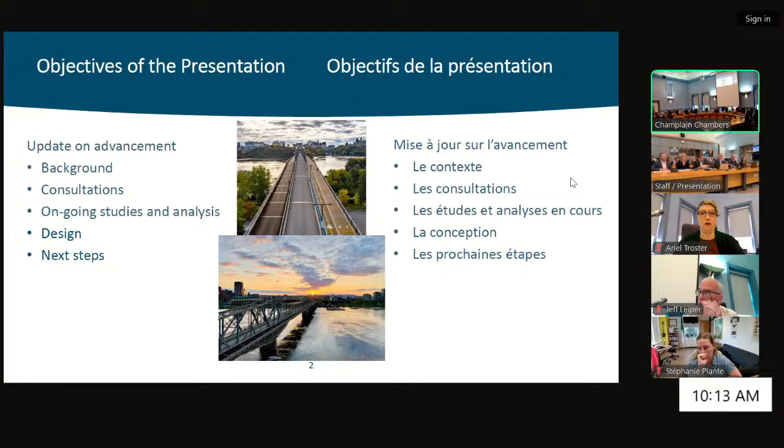Thank you, Stéphanie. Are we changing slides, or okay. So, next slide please. Yeah. I'm sure that... the previous slide.

There we go. I'm sure you're aware that the Alexandra Bridge is at the heart of the capital. It's steps away from Parliament Hill and it spans over the majestic Ottawa River. It connects Boulevard des Allumetières in Gatineau to Sussex Drive and Mackenzie in Ottawa, and it's also an important segment of the Confederation Boulevard.

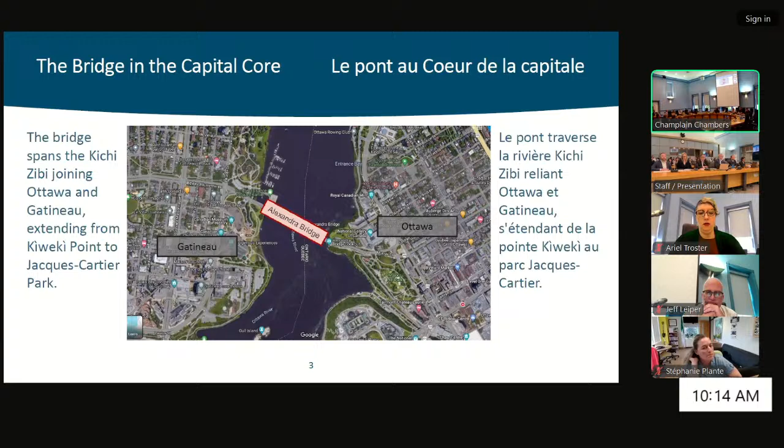Next slide, please. So in Ottawa, the bridge lands at the escarpment between Kìwekì Point and Major's Hill Park, and it's also a doorway into the Byward Market.

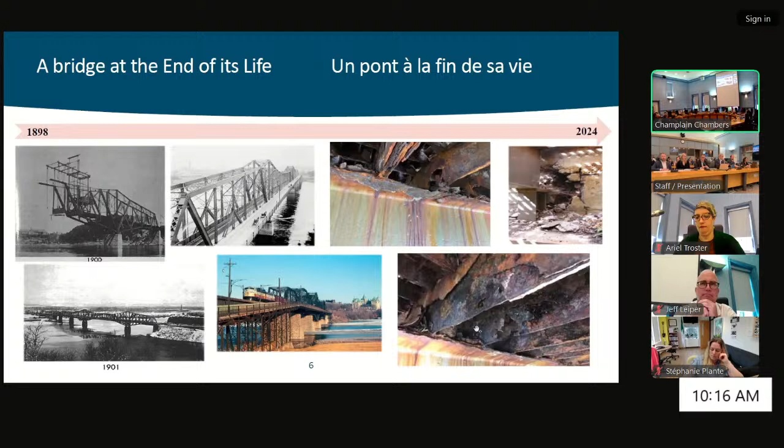Next slide, please. So following the decision to dismantle the historic bridge, in the summer and fall of 2023, work began on a series of studies led by the technical advisor team, one of which is a cultural landscape focused heritage impact analysis, or HIA. The HIA is the process being employed on the project to understand the heritage value and character-defining attributes of the Alexandra Bridge and its prominent cultural landscape setting.

Ultimately, the goal of the HIA is to help ensure that these values are carried forward in multiple ways, notably through the design of the new bridge and through commemoration.

The goal is also to ensure that the new bridge harmoniously integrates with its symbolically charged, complex, and very layered setting. Our study area comprises the river-focused lands and waterways bounded by the Chaudière Crossing to the west and the Macdonald-Cartier Bridge to the east.

The work itself encompasses historical research, detailed analysis of the contemporary physical and cultural setting and how the historic bridge participates in it. There's heritage value assessment and identification of the tangible and intangible attributes that carry these values. An assessment of the impact of the dismantlement of the historic bridge has been undertaken based on these values and attributes. This has provided the starting point for articulating a future-focused set of cultural landscape objectives and a heritage conservation approach to ensure the development of a bridge design that helps to bridge past, present, and future. The HIA process has been happening in parallel and coordinated with the design process, with the HIA team working in close dialogue with the bridge designers.

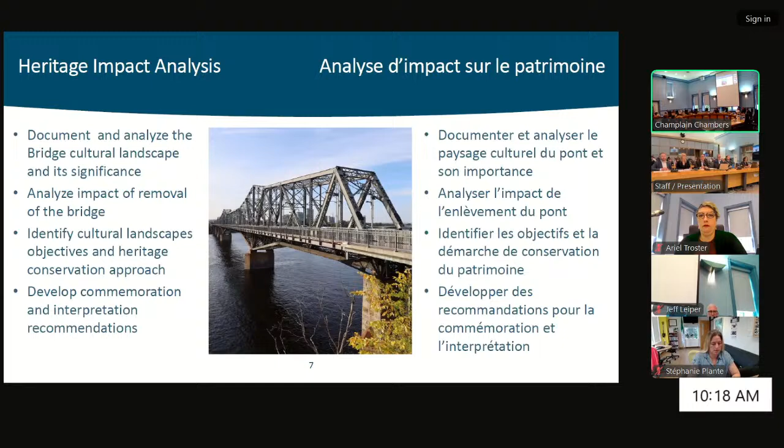A series of traditional knowledge and land use studies led by Algonquin communities are underway and serve as the authoritative sources of information about this landscape.

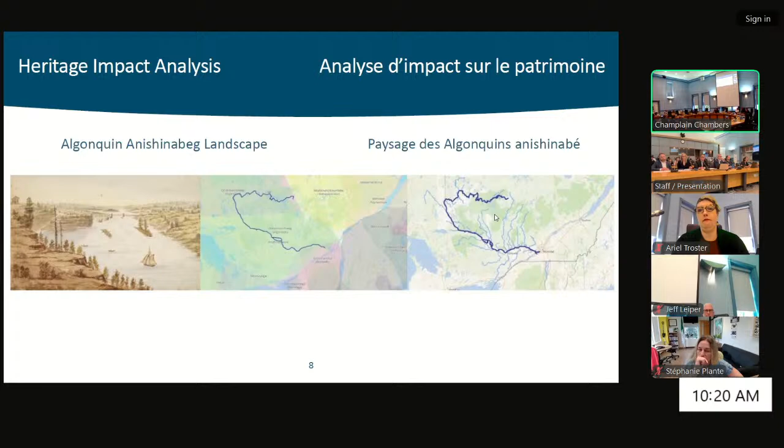Next slide. The urban landscape emerged after the first permanent European-style settlements were established on both sides of the Kitchissippi or Ottawa River in the early 19th century. At that time, the urban landscape was characterized by primary resource development that relied on the river's water for power and transportation. The Alexandra Bridge itself is associated with a very specific era of the region's development, which saw the expansion of rail transportation in support of resource extraction and Ottawa's development as the capital of an emerging nation. This is a landscape that was focused on movement of goods and people, with industrial and commercial development on both sides of the Ottawa River, and it was part of, and sometimes in tension with, the capital landscape.

Half a century after its construction, the rails were removed from the Alexandra Bridge and the surrounding infrastructure was transformed to accommodate exclusively vehicular traffic and pedestrian routes. Within the cores of Gatineau and Ottawa, former railscape corridors and industrial lands became part of the growing parkland, with ribbons of green spaces along waterways and through spaces that had once housed smokestacks and steam trains. Over time, the crossing also became a critical community connection point, both physically and symbolically, in a region often marked by boundaries and divisions. The Alexandra Bridge is not considered as belonging to either Ottawa or Gatineau; the crossing is symbolically shared by both sides of the Kitchissippi or Ottawa River.

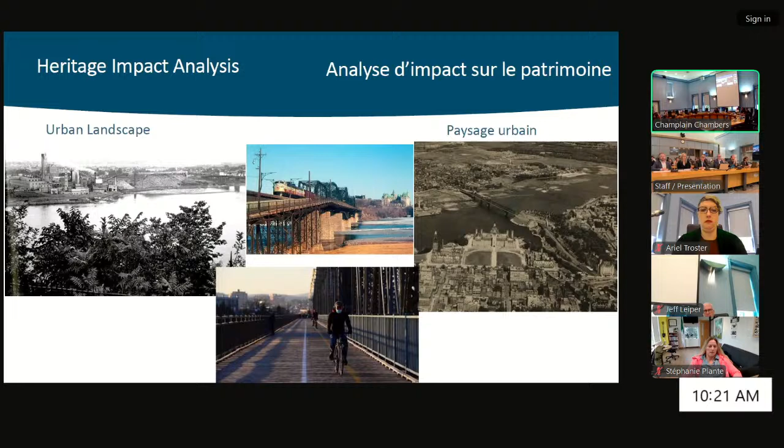Next slide. The central capital landscape is a designed and evolving landscape that has developed in tandem with the evolution of Canada's national identities and with capital planning. Originating with the creation of Parliament Hill and the Parliament buildings in the 19th century, it expanded gradually to encompass the river-focused lands on both sides of the Ottawa River, connected by bridges, including the Alexandra Bridge, and more recently a ceremonial ring road, known as Confederation Boulevard, of which the bridge is part. Many elements of the historic railscape and industrial landscapes of the region have become part of the central capital landscape and contribute to its character and identity.

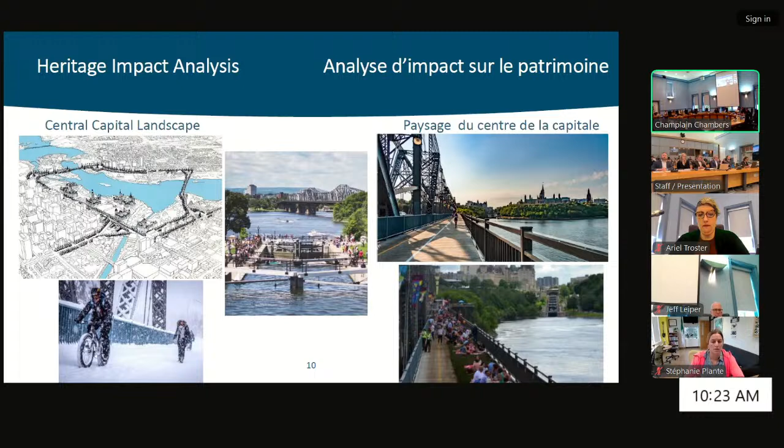And at present, we're witnessing a gradual transformation of this landscape through the renewal and emergence of Indigenous patterns of use and activity, and through a variety of projects and initiatives. Examples include the Museum of History, Kìwekì Point, the Future Block 2 project, and many others, all of which are recontextualizing and reimagining colonial dimensions of this setting. Next slide.

Through cultural landscape analysis, we've identified 4 high-level themes that represent sustained patterns within this setting across landscapes, eras, and cultures, which serve as a starting point for bridge design. They are: evolving relationships to land; a landscape of connection, which has moved people across the region, brought diverse groups together, and inspired unity across borders; a living experiential landscape which speaks to shifting human relationships with the Ottawa River over time; and a symbolic landscape tied to capital and Canadian identities.

Looking at the immediate setting of the Alexandra Bridge highlights both the extraordinary sensitivities of this prominent setting, as well as opportunities for the bridge project.

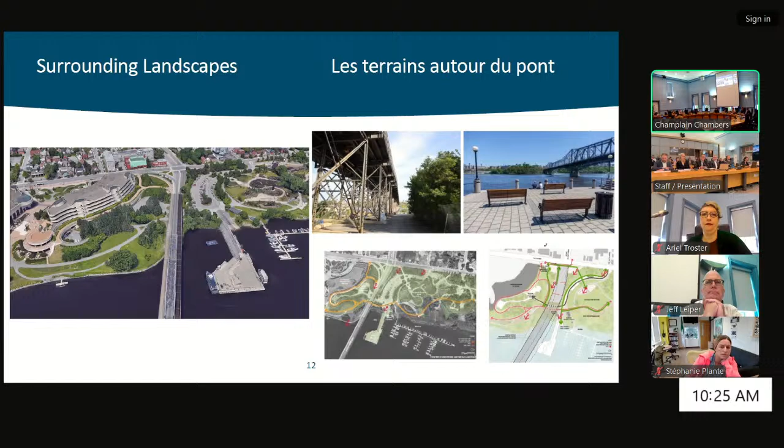On the Ottawa side of the river, in addition to Parliament Hill, we have the Rideau Canal World Heritage Site, Majors Hill Park, the National Gallery, and Kìwekì Point.

Something previously noted, especially on Parliament Hill and Kìwekì Point, is the sensitive renewal and transformation underway. This renewal is taking place in ways that balance a respect for history and heritage, while at the same time expressing 21st century aspirations, notably ones related to truth and reconciliation, accessibility and inclusion, ecological restoration, and sustainability. These projects are also recognizing in important ways the centrality of the Kitchissippi or Ottawa River across cultures and eras.

Through our cultural landscape analysis, Indigenous engagement process, and assessment of the value and meaning of the Alexandra Bridge as an engineering work, as a form of architecture, and as a multi-sensory experience of the river and public space for communities and tourists, we are working to bridge past, present, and future. This will commemorate what will be lost through the dismantlement of the historic bridge, but also carry forward value-bearing aspects of the bridge and its role in its evolving urban and capital setting through the design of the new bridge.

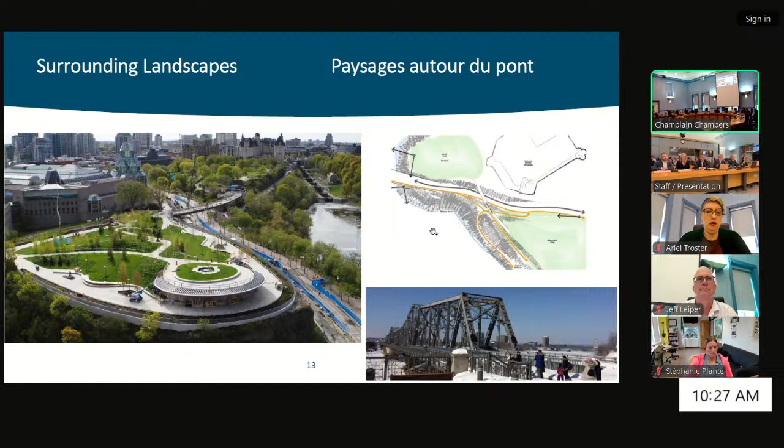In addition to the heritage impact assessment, which is informing the project team, we've got numerous other aspects that the team is using to advance the design concepts. Over the next few slides, I'll go over some of those.

Some of the fundamental documents guiding the team are the planning and design principles, as well as the performance criteria for bridge design. These two documents were approved by the NCC Board of Directors a few years ago. They give us clear criteria to meet, and they're also a transparent process which we can use to design the new bridge.

We also have the detailed project description that was produced by the team. It was presented to the Impact Assessment Agency, and based upon the strength of that document, the Impact Assessment Agency decided to pull out of the impact assessment and let PSPC manage that.

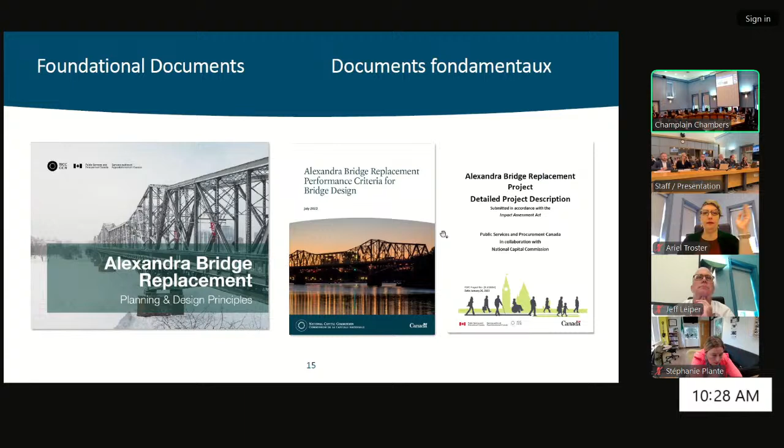Through some of these documents, the public consultations, and engagement with our partners, functional needs were established for the replacement bridge. Starting on the west side of the bridge, we're looking at having a lookout area where people can stop, sit down, stand up, and enjoy the views from the bridge. We're looking at having a pedestrian walkway, wider than the existing bridge. Separate from that, we'll have bidirectional cycling lanes, also wider than what's on the existing bridge. And on the east side of the bridge would be 2 traffic lanes, one in each direction.

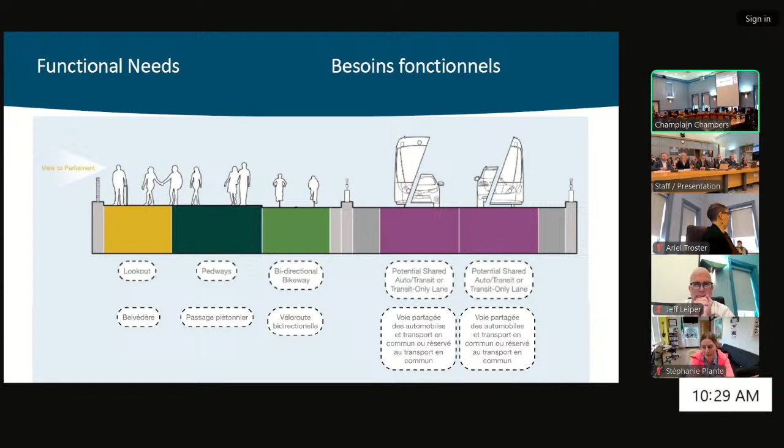For now, the traffic lanes would be used by vehicles or public transit, but the lanes and the bridge would be designed to welcome a tramway, should a tramway be required on the bridge in the future.

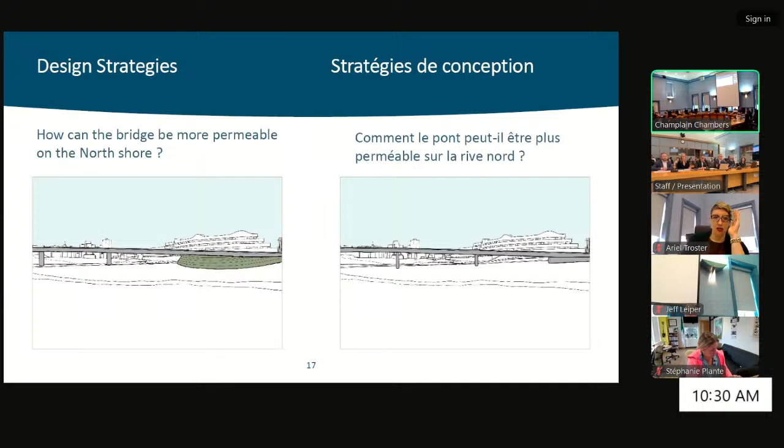Various design strategies that we're looking at: on the North Shore, in Jacques Cartier Park, we want to make that area more permeable. Right now it's heavily dense because of the current structure that's there. What we're looking at is opening up that space and improving the connectivity between the bridge, the cycle paths, and the shoreline. One way of doing that is looking at a slight adjustment in the location of the bridge, maybe a different alignment slightly downstream.

In terms of height of the structure, we're looking at respecting the topography, so nothing that is significantly higher than the topography that's there or some of the cultural buildings that are there.

Third, in terms of structure above deck, we're looking at something that's appealing, that has architectural features that will resonate with the community.

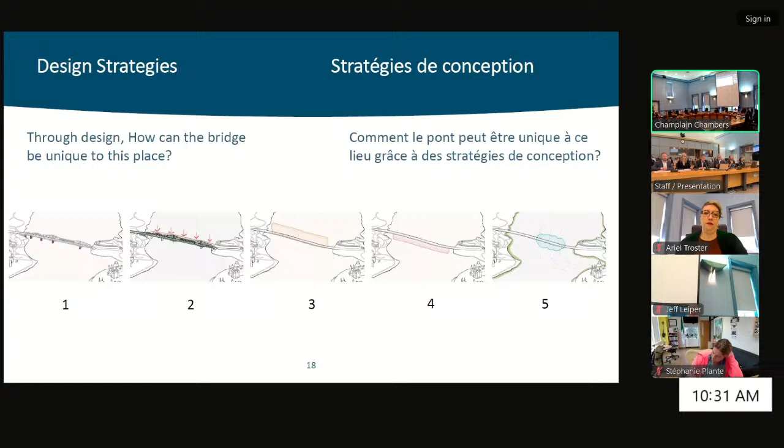And then lastly, in terms of the navigable waterway, we're looking at maintaining the current waterway, so similar dimensions.

Over to Jordan, I believe. Thank you, Paul. One of the first steps in this process was to proceed with an impact assessment, as this project is subject to the Impact Assessment Act.

We submitted a detailed project description, which includes identification of foreseeable impacts before, during, and after construction, as well as mitigation and follow-up measures. The Impact Assessment Agency of Canada reviewed this document, and in March of last year, considered the document complete, and we are now in the process of fulfilling our legislative requirements with respect to the environment.

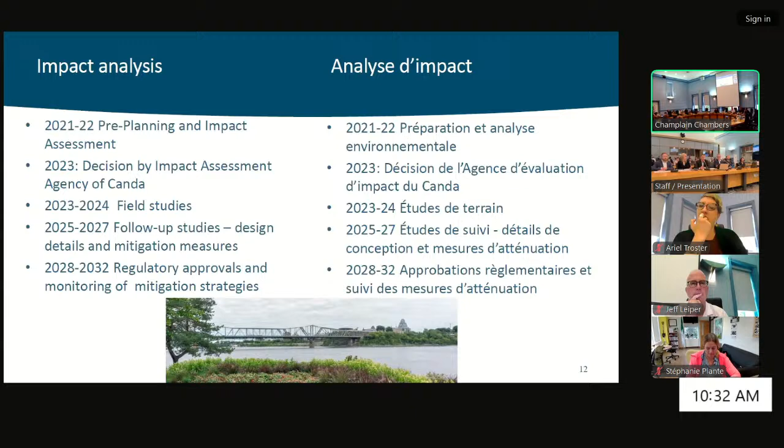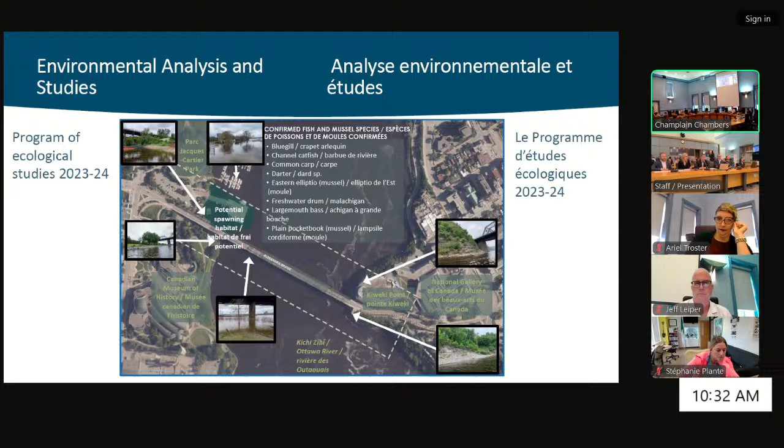The team, as we have seen, is made up of PSPC and NCC employees who are excellent. And in order to continue our studies as well as further define our bridge design concepts, we have contracted a consultant, Arup Canada Incorporated, who is world-class, and they're supporting the team throughout the development of studies and processes. With respect to the groups that we are engaging with, the objective and the challenge is to bring the interests of each of these groups together towards a final design concept.

Probably the most important chapter in this process is our engagement with Indigenous communities. We have to date engaged with 19 different communities from 3 different nations. There have been 2 rounds of public consultations to date, in October 2020 and November 2021, with one upcoming in October of this year.

There's the Public Advisory Committee, which brings together representatives from various spheres of the community, and there's engagement with all stakeholders who will be directly affected by the work. The team and the project also benefit from the expertise of 2 of NCC's national expert committees, the Advisory Committee on Planning, Design, and Real Estate, ACPDR, and the Advisory Committee on Universal Accessibility, ACUA. A committee of independent experts has also been established through the Royal Architectural Institute of Canada to support the team in the development of design options.

All of these conversations, feedback, and thinking are going to flow into the final design concepts for this bridge, which, as I mentioned, will be shown in October of this year.

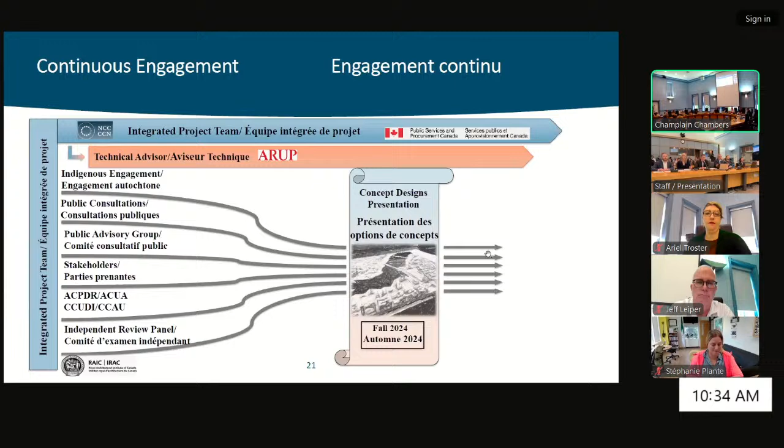A bit of a snapshot of where we are now: we are currently in the planning phase, working on studies and concepts. A design phase will proceed, and construction will start in 2028, with completion expected in 2032.

The Alexandra Bridge has served the Ottawa-Gatineau area very well. However, it has surpassed its initial functionality. As demonstrated by my colleagues earlier in this presentation, now is the time to replace it.

It also puts us in a position to seize many opportunities, such as improved mobility for active transportation. The new bridge will have gentler slopes and will also allow for better segregation of users, i.e. pedestrians and cyclists, while creating far more inclusive public spaces. In keeping with the long-term vision for the National Capital Region, the new bridge will be designed to allow for the conversion of vehicular lanes to streetcar lanes.

This provides the Ottawa-Gatineau region with the opportunity to adapt to new urban travel standards in the years to come. The views from the bridge are currently being studied in order to preserve and even improve these perspectives. We have two jewels in this area, Ottawa-Gatineau, and we are going to improve the viewpoints from the bridge.

On the Gatineau side, the new structure will offer the opportunity to improve connectivity and accessibility along the river, something that the people are asking for. The project also offers the opportunity to introduce subtle variations to improve and modernize Confederation Boulevard. There are many other opportunities that will be revealed as we continue through this process and as we continue to meet with our very important stakeholders and public groups.

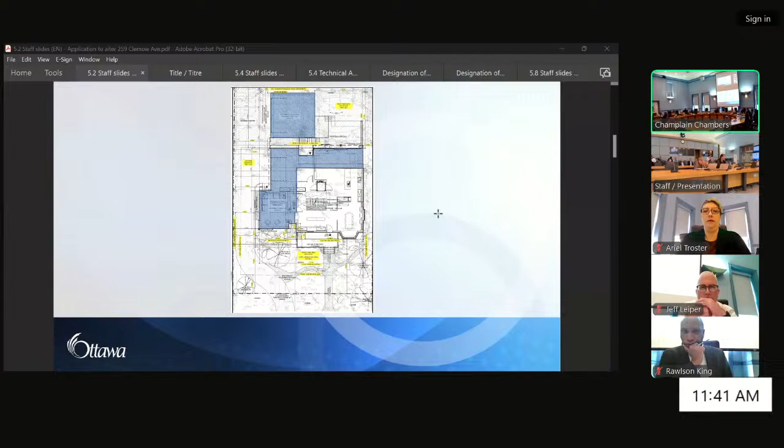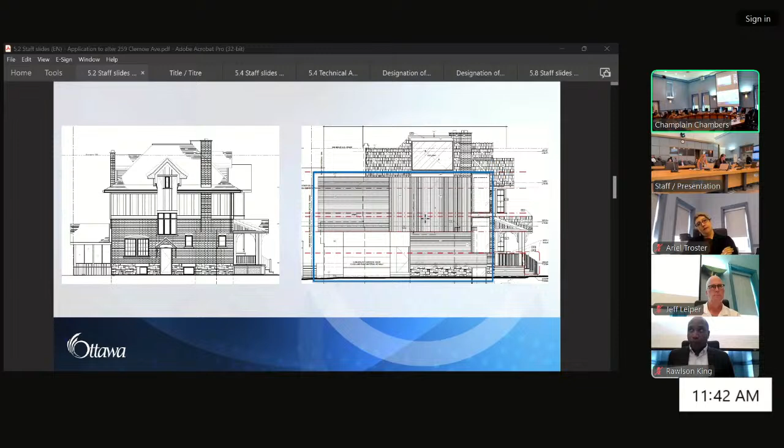Next slide. Here's the addition from the side, which is the west elevation. The addition is set back slightly from the front wall of the house. Next slide again. And this is the rear, showing the addition again highlighted in blue on the right-hand side. Next slide, please.

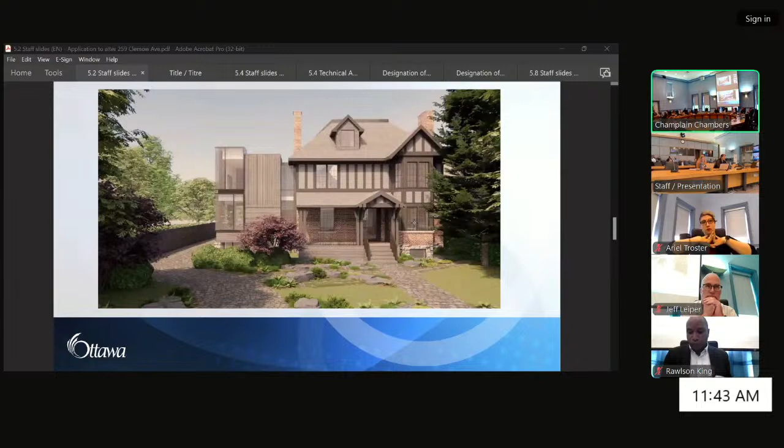The proposal has been evaluated against the guidelines in the Clemow-Monkland Driveway and Linden Terrace Heritage Conservation District plan. Staff have determined that the proposal is consistent with the plan for the following reasons. The height of the addition is lower than the height of the roof of the existing building, as it will be just above the eaves line. Further, a recessed glazed link, referred to as a gasket, is even lower than the eaves line, thereby creating more separation in location, height, and setback from the Tudor Revival house. The location of the addition is in the rear and side yard. The HCD plan has a guideline regarding the placement of additions, that they should typically be in the rear. However, when a side yard addition is proposed, it should be set back from the front wall. The addition is set back from the front wall; however, it is staff's opinion that it should be pushed back further in order to ensure subordination and better understanding of the three-dimensional volume of the existing house. A condition to set back the addition further from the front wall is recommended as part of this application. The design of the addition is contemporary in nature, however takes design cues from the house in terms of datum lines and proportions. The HCD plan allows for a variety of design styles on additions, provided that it complements and respects the cultural heritage value of the district.

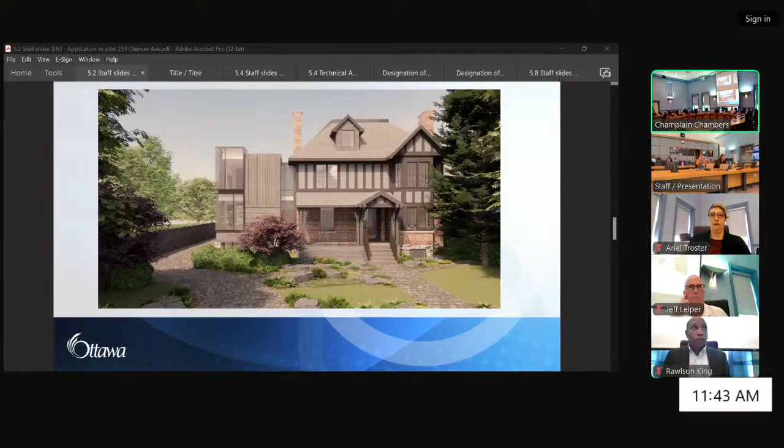Next slide, please. The material used on the addition will be primarily wood with some bronze cladding used as an accent. While used in a contemporary manner in the design, the use of wood is appropriate in the district and subordinate to the brick of the house. The primary treatment of the heritage structure is restoration. The roof cladding will be replaced with cedar shakes, and the porch will be retained with some elements proposed to be replaced with metal. The windows on the existing house are not original and will be replaced with new windows.

However, not all the windows are currently proposed to have divisions. A second condition has been recommended by staff to ensure that the materials and details on the porch meet the HCD plan, as well as that all windows have appropriate divisions on the historic house.

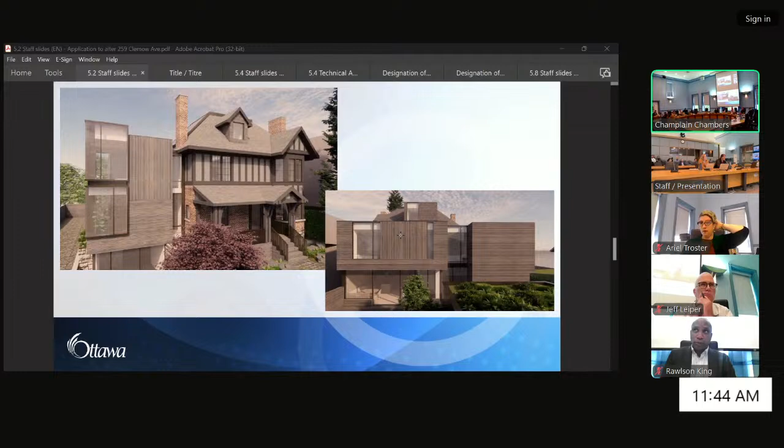Finally, the landscape plan features a front yard garden, simple limestone walkway, and planting of 2 new trees. A new permeable driveway will be installed and a green roof will be planted on the detached garage, enhancing the greenery on the property.

Just to go over the conditions quickly, as mentioned, we're recommending conditions be in place to better meet the policies and guidelines in the HCD plan. The first one here is related to the setback of the addition.

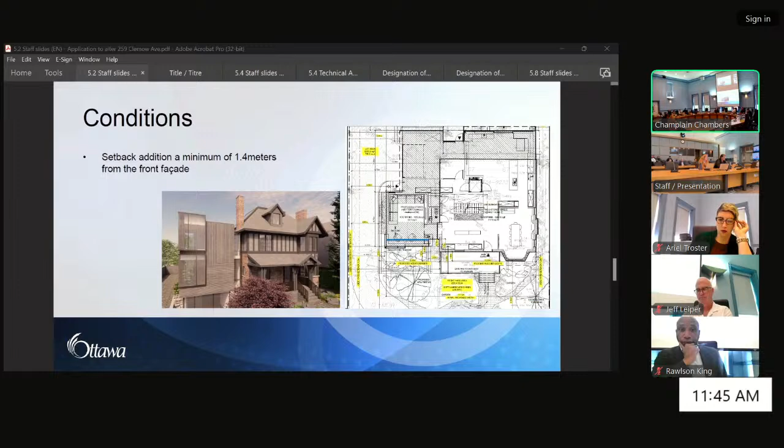To improve the conservation approach on the house, staff also recommend that all the windows on the existing building contain the appropriate muntin bars. Further, the approach on the porch should be improved by the use of wood on the baluster instead of metal and refining the details of the skirting. These recommendations are echoed in the heritage impact assessment submitted as part of the application.

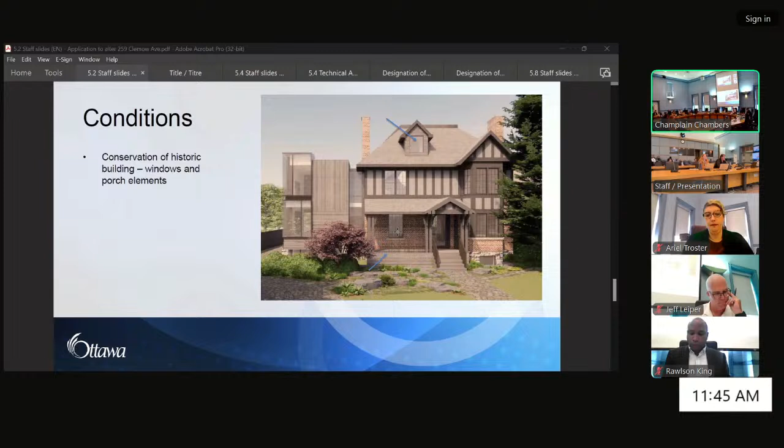In terms of consultation, the Glebe Community Association and Heritage Ottawa were notified, as was the ward councillor and the neighbors.

Finally, staff recommend to approve the application for the alteration subject to the conditions just outlined, and issue the permit for a 2-year expiry date.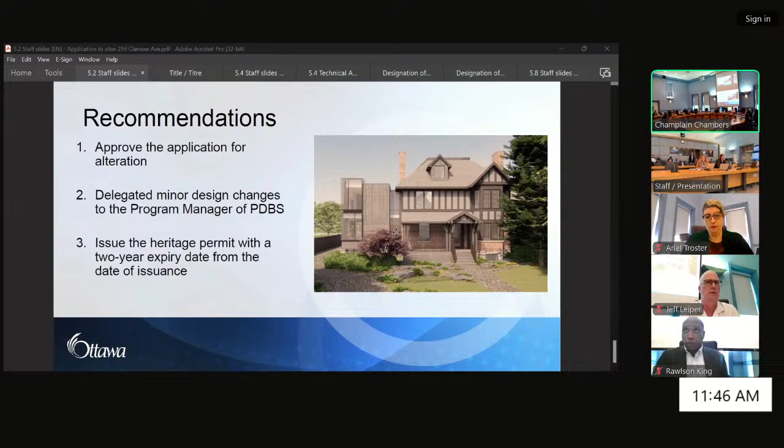Thank you. Thank you so much for the presentation. We did receive correspondence from Heritage Ottawa as well as four residents.

We do have a number of registered speakers, including the applicant team. I don't know if they want to speak. We also have Heritage Ottawa registered, as well as Robert Player registered. I didn't know if the applicant team is with us and wanted to comment. Okay, and Heritage Ottawa, if required, I don't know if Linda Hogue is still with us. And then we do have Robert Player as well registered. Yes, please, if you want to delegate, please go ahead.

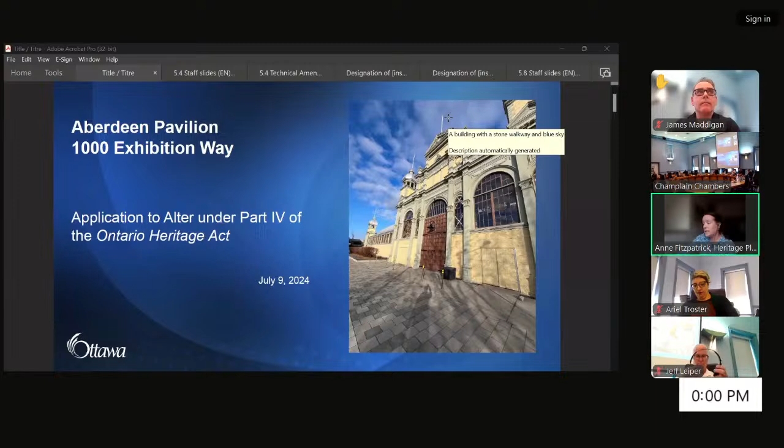Good afternoon, and thank you, Leslie, for the introduction. This presentation is for the application to alter the Aberdeen Pavilion. As Leslie mentioned, it's a hybrid presentation, and it's also a joint presentation today. I'm the heritage planner who's been working on the file, and also here today are Robert Martin and Summer Bourgon from RMA and SH Architects, Josiah Fogarty the structural engineer, Sean Stanhead, and Matt Knight, Manager of Design and Construction, Facilities at the City of Ottawa. Next slide, please.

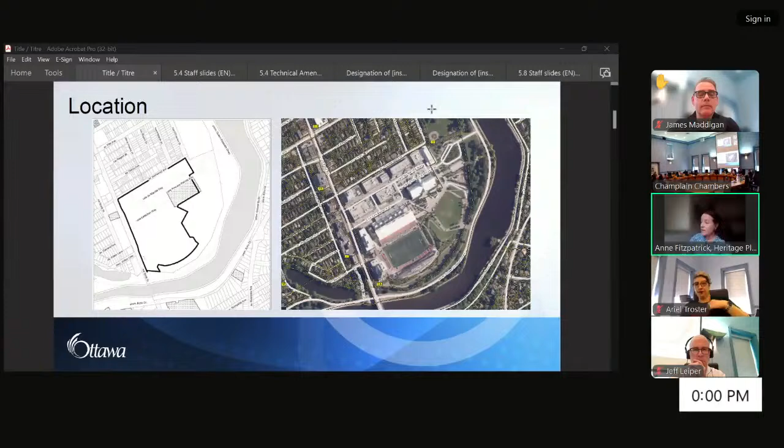The building is located in the center of Lansdowne Park, in the Glebe, and is adjacent to the Rideau Canal. The Aberdeen Pavilion was constructed in 1898, designed by architect Moses C. Edey and constructed by the Dominion Bridge Company. It is a structural steel and pressed metal exhibition hall. The building has heritage status at the municipal, provincial, and federal level, is designated under Part 4 of the Ontario Heritage Act, and is a National Historic Site. It is also subject to an easement with the Ontario Heritage Trust, and the proposed rehabilitation will require their permission.

The project team has been working closely with the trust, and they are supportive of this project. The building is an iconic heritage building in Ottawa. It's the only large-scale exhibition building in Canada surviving from the 19th century, and it's an important engineering achievement as the first use of long-span steel arches exposed to the interior. I'll now pass it along to Matt Knight, who will provide an overview of the project details.

Thank you, Anne, and thank you, committee. Infrastructure and Water Services is rehabilitating Aberdeen Pavilion as part of our standard life cycle program. The work proposed builds on past city conservation activities in 1992 and 2017, and was prompted by a 2019 condition audit identifying sources of water infiltration and deterioration of certain building elements. This project is distinct from the Lansdowne 2.0 project; however, both teams are in regular communication and schedules are being carefully coordinated to minimize impacts to residents, businesses, and the Lansdowne 2.0 project. Funding has been secured for design, construction administration, and essential structural work. Further funding needs will be identified as part of the 2025 budget process. Now I'll hand off to Summer, who will take us through some of the further project details.

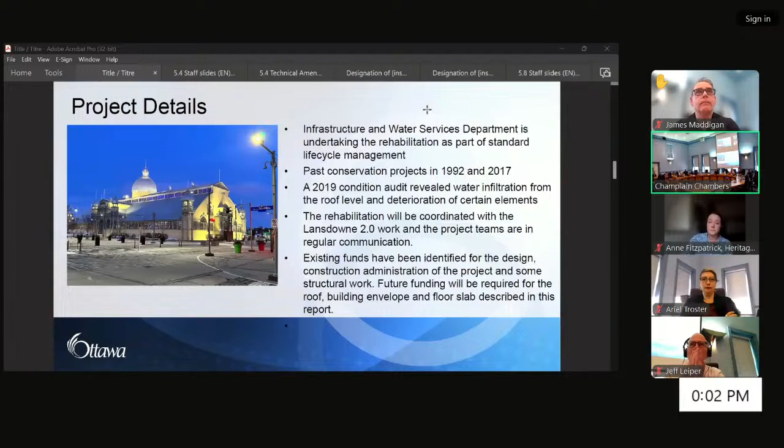So the project as a whole is focusing on the rehabilitation of the entirety of the building envelope. As Matthew mentioned, there are significant concerns with the roof, so that is the main scope of work for the project. In addition to metalwork repairs, structural strengthening, rehabilitation of windows, doors, concrete floor, and lead paint abatement inside the building. So that's just a general snapshot of the whole project.

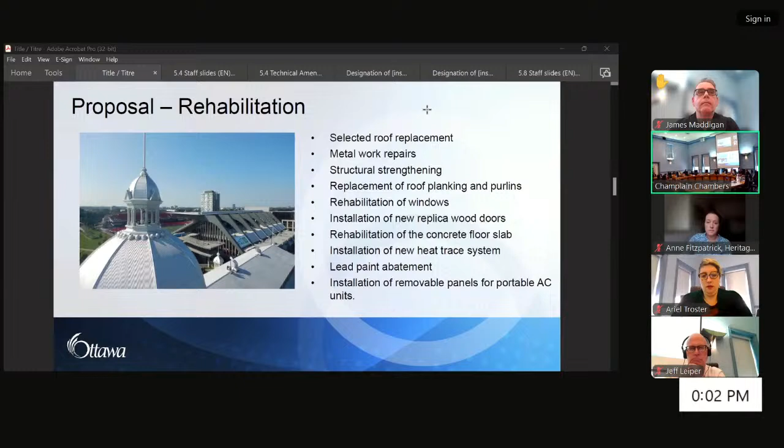When City of Ottawa started this project back in 2021, one of the main focuses at the beginning was documentation. As you can see in the photo, they commissioned a laser scan back in 2021 of the entire building. We've actually just completed another set of laser scanning with Multivista in 2024 as well. So we have significant documentation to work from to capture all the conditions in the building.

We also did a detailed condition assessment with the RMA plus SH and Stantec team in 2023 from the ground and by lift, so an up-close review to capture all the conditions and thousands of photos as well for record.

In 2023, we completed tie rod scanning. There are tie rods that span between the trusses inside the building, so we did scanning to locate those tie rods and also did some slab investigations to look into the rehabilitation of the slab. Hazardous material sampling was done this year, as well as some lead paint removal mock-ups, which were completed a couple weeks ago. Coming up as well, there's going to be some geotechnical investigations done in support of the project. So a really comprehensive investigations and documentation package to kick it off.

Going forward with this project through the design, we've also been looking heavily at the 1992-1993 Julian Smith restoration package, which was completed at that time. That's been a really sound basis for our design as well.

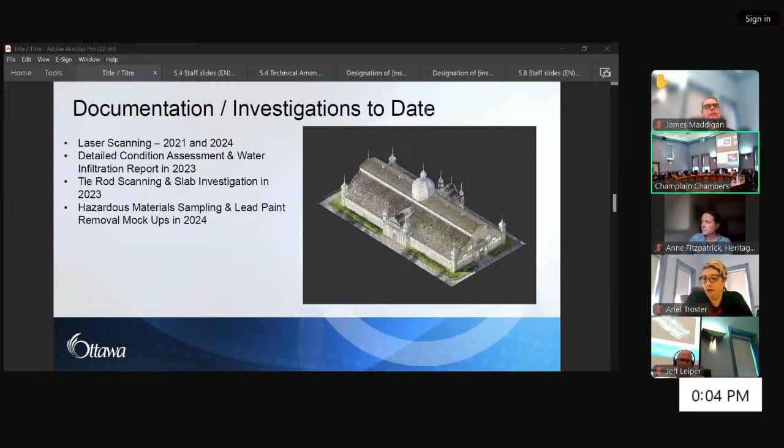Looking at each of the individual components, the roof is really the big ticket item here, as Matt mentioned, with the water infiltration that was noted in our infiltration report. The condition of the roof is very poor. Water effectively finds its way in through any little hole. There's no waterproofing membrane on the roof. Due to the ongoing water infiltration that's been happening over many decades, the wood boards and purlins have also significantly deteriorated as part of the roof deck. So the main focus of this project is replacing the roof.

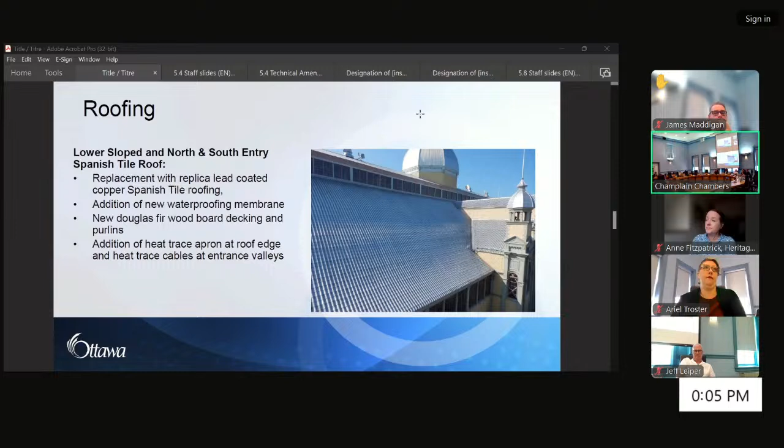The bell cast roof, which is the large slope roof you see there, has a Spanish tile, pressed Spanish tile roofing system. We're going to be replacing it with replica Spanish tiles, adding a waterproofing membrane because none exists right now, and replacing the wood board decking and wood purlins as well. In addition, with some of the ice and snow buildup issues we're seeing on the roof, we are adding a heat trace system along the eaves and replacing the existing heat trace system on the north and south pavilion entrances.

At the dome and clerestory and east and west entry roofs, these are currently corrugated roofing systems. They are also going to be replaced with a lead coated copper system, same as the replica Spanish tile, which will replicate the pattern of the corrugated roofing in a pressed tile. We are going to be adding the waterproofing membrane on the clerestory roof and the east and west roofs, and doing localized replacement of the decking at this level, as it's not as deteriorated as the bell cast roof.

On the turrets and cupola, these roofing systems are slightly different, flat sheet roofing. They're in fairly good condition, so they're just going to be locally repaired and repainted. The turrets and the floor of the cupola are fairly corroded, so they will be replaced in kind with new galvanized sheet. The ceilings as well, which you can't really see in these photos, but the ceilings inside the cupola and the turrets will be replaced in kind with new wood board.

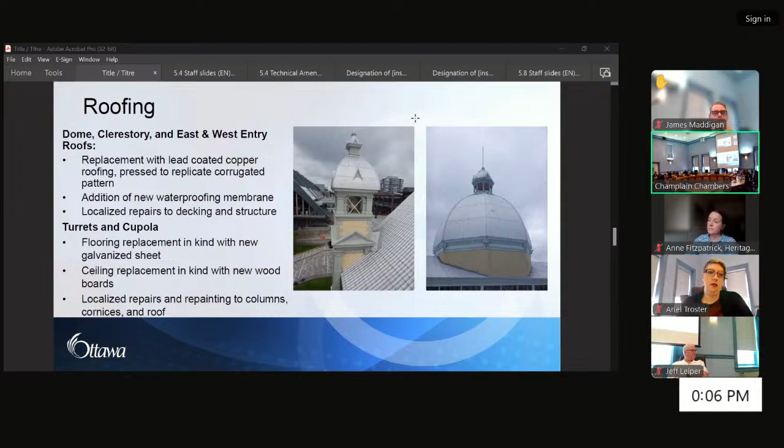Wood windows and doors. The windows are a fairly significant portion of this project as well. They were replaced in the 1992-1993 restoration for the most part, but they have seen some significant deterioration, peeling paint, a little bit of water infiltration, failed putty, that sort of thing. So we're going to be doing a full restoration campaign for windows, stripping paint, doing repairs, and applying new paint to all the sashes and frames.

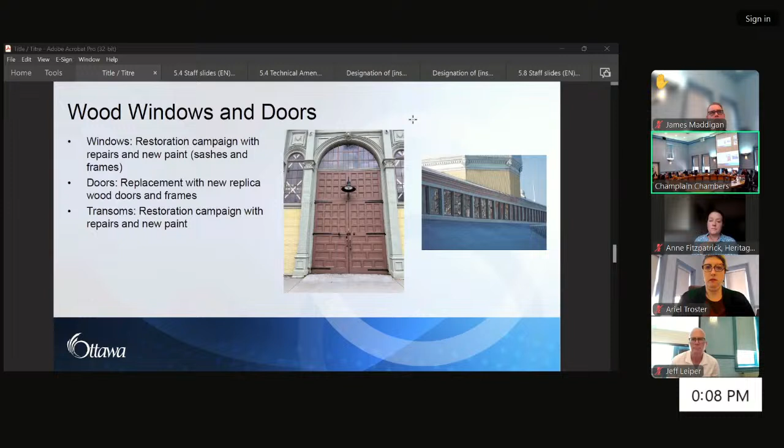The transoms above the doors are in fairly good condition with minor localized deterioration, so they will be restored as part of the project.

The exterior walls are predominantly in good condition, with local areas of deterioration, peeling paint, and damage. So this aspect of the building will just see repairs and repainting as needed, with some replacements where elements are too deteriorated to economically repair.

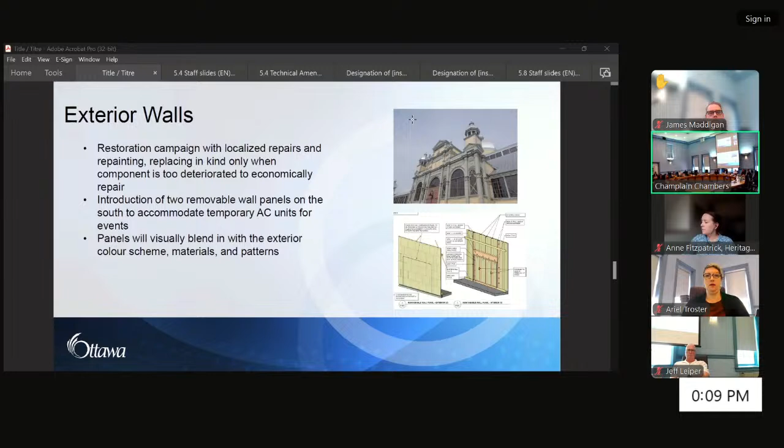As part of the functionality improvements for the building, we will be introducing two removable wall panels on the south side to accommodate temporary AC units brought in throughout the year for events. Currently, sets of windows are temporarily removed to accommodate running ducting from the AC units into the building. So we're introducing a more permanent solution that will be less intrusive than temporarily removing those sensitive windows.

On the interior, we have lead paint on pretty much every interior wall surface. The light yellow paint you see in the building, which is also on the structure, is lead containing. So as part of this project, especially given the condition of the lead paint peeling in many areas, we are going to be fully stripping all of the lead paint.

We're currently looking at many different options for removal, including dry ice, laser ablation, and chemical methods, through lead paint removal mock-ups. Then when everything's been stripped and cleaned, we're going to repaint in the same color with a non-lead containing paint, of course.

The concrete floor slab is going to see rehabilitation works, and the steel structure, which is pretty iconic to the inside space of this building, is going to just see local repairs and strengthening. Some additional members will be added at the base of the roof to assist with roof loading, and any new steel that's added is going to be date stamped and bolted to distinguish it upon close inspection.

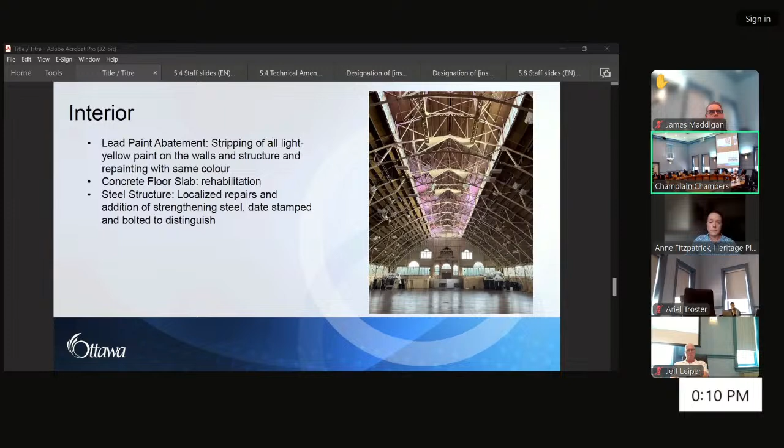Thank you, Summer. Staff are recommending approval of the application, as the rehabilitation conserves the cultural heritage value of the Aberdeen Pavilion as identified in the Statement of Cultural Heritage Value and the National Historic Site Statement of Significance. As detailed in the staff report, the rehabilitation meets the standards and guidelines, and the heritage attributes of this important building will be conserved.

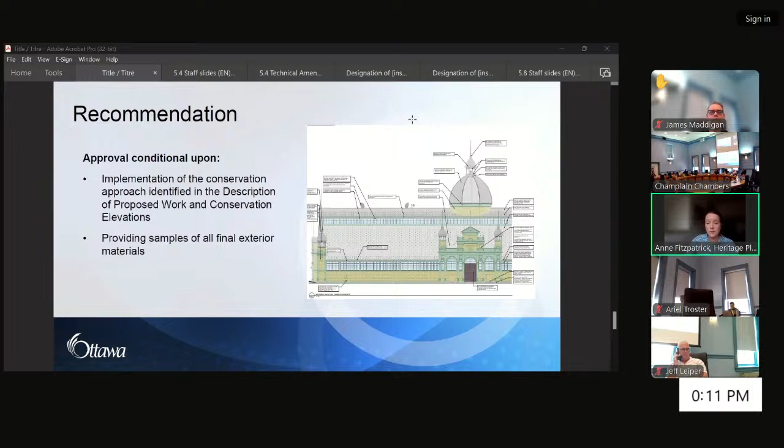The approval is conditional upon the implementation of the conservation approach identified in the description of proposed work and conservation elevations attached to the report, and on providing samples of all final exterior materials. That concludes the presentation.

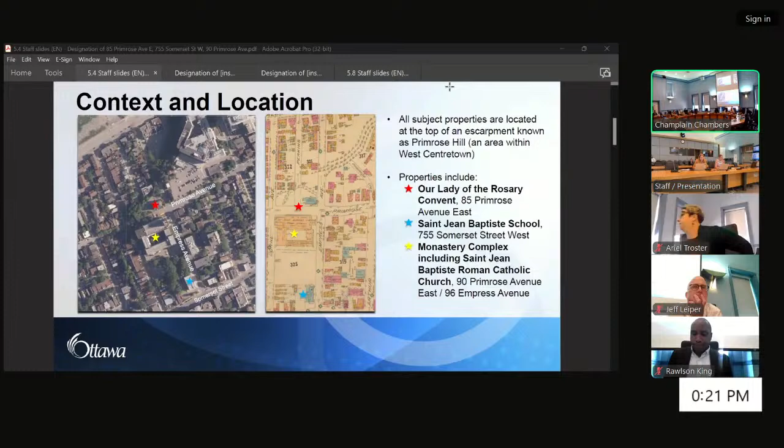The 3 buildings were constructed between the late 19th century and the early 20th century and are all limestone construction, historically contributing to the growing Catholic Francophone community in the late 19th century in the area surrounding Primrose Hill. Together, they play a role in defining the area and stand as tangible evidence of this area's educational and religious landscape, reflecting the historic French-Canadian character of the area.

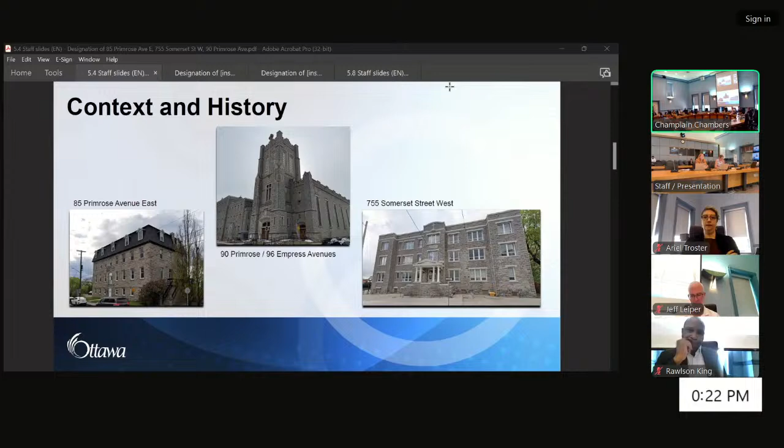The first building being recommended for designation is 85 Primrose Avenue East, which is the former Couvent Notre Dame du Rosaire. This building meets 6 out of 9 criteria. The convent was designed by Georges Bouillon, architect of the Ottawa Diocese, and constructed in 1890. It is a representative example of a 19th century convent with Second Empire influences and classical ornamentation.

The attributes that reflect this style include its mansard roof with evenly spaced gabled dormers, natural limestone construction, and its balanced symmetrical facade. As a purpose-built convent by the Grey Nuns of the Cross, this building is associated with the education of young French women in the early 20th century. Notable women who attended this convent include Jeanne Sauvé, Canada's first female Speaker of the House and Governor General, as well as Henriette Bourque, the first female lawyer to work for the Federal Department of Justice.

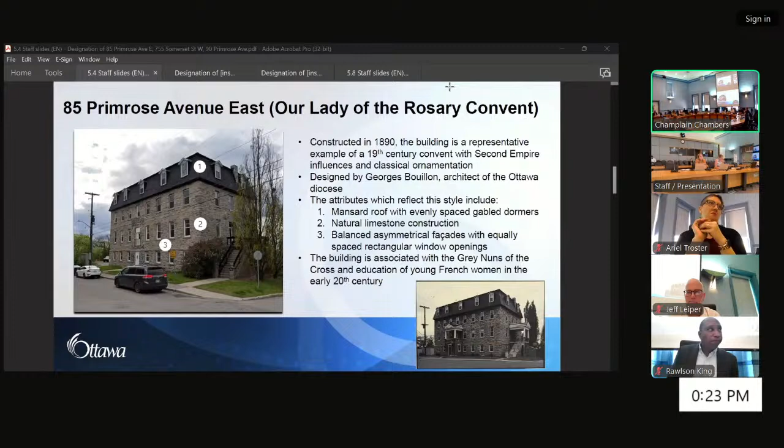The next building is the former École Saint-Jean-Baptiste at 755 Somerset Street West. This property meets 5 out of the 9 criteria. The school was constructed circa 1887 and is a representative example of a purpose-built late 19th century stone French language Roman Catholic school with neoclassical elements.

The attributes that reflect this style include, but are not limited to, the entrance porticos, regular coursed limestone walls, decorative carved namestone, and smooth limestone banding with central limestone cross with corbel.

The building has historical and associative value due to its direct association with the development of French language education in Ontario and the opposition to Regulation 17, which was a 1912 provincial regulation that made English language instruction mandatory in elementary schools. The school was also part of the Institute of Christian Schools and run by the Ontario Christian Brothers, who played a crucial role in the development and expansion of Ontario's publicly funded Catholic separate school system.

However, it must be acknowledged that since the 1980s, a difficult legacy of harsh discipline and physical and sexual abuse by many members of the order across North America has surfaced.

Last is the monastery complex, which includes a seminary, interior cloister, courtyard, stone wall, and Église catholique de la Paroisse Saint-Jean-Baptiste. This complex is a rare example of a monastery in Ottawa from the late 19th and early 20th century. This property meets 8 of the 9 criteria.

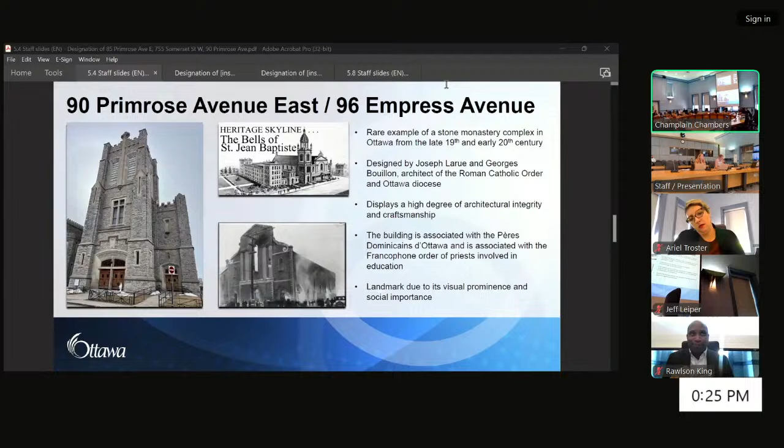Key exterior attributes that contribute to the heritage value include its enclosed monastic plan with central courtyard and interior cloister, its limestone perimeter walls, limestone panels incised with a Latin Dominican cross, a metal fence featuring Latin cross details, a buttressed bell tower, and evenly spaced stained glass windows.

The interior is not included in the designation as it has been altered. Staff also believe that by excluding the interior, it allows for the greatest flexibility for this space.

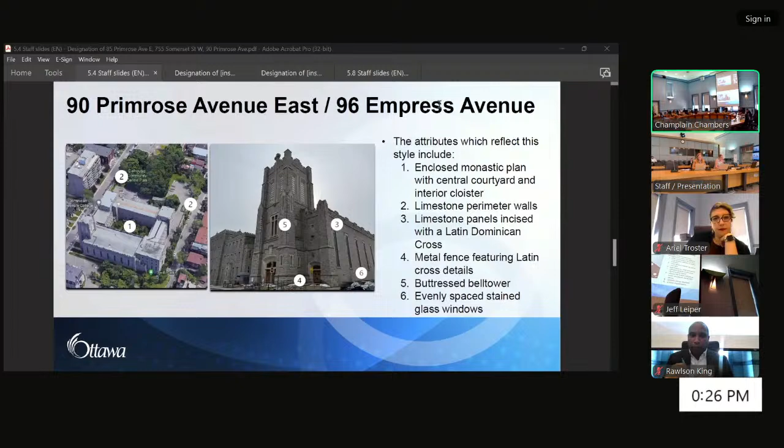Each of the properties is recommended for individual designation under Part 4 of the Ontario Heritage Act, as they are all early stone buildings associated with a religious entity and the growth of Francophone education. They also contribute to our understanding of the area. Together, they stand as evidence of this area's earliest education and religious landscape. Staff have reviewed the properties and determined that each meets at least 5 of the 9 criteria for designation.

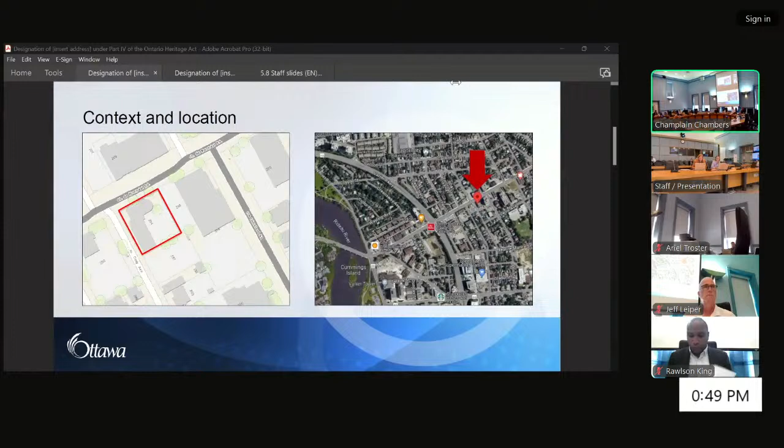St. Margaret's Anglican Church is located at the southeast intersection of Montreal Road and Cody Avenue in the Vanier neighborhood of Ottawa. Vanier's neighborhood boundary follows the limits of the former municipality, the city of Vanier, and the western edge of Vanier is defined by the Rideau River. Next slide, please.

The cultural heritage value of St. Margaret's Anglican Church is found in its design, its historical associations, and also in its context. St. Margaret's Anglican Church was found to have design value as a representative example of the Gothic Revival architecture inspired by the early English period. Typical of Gothic Revival styles, the church features a steeply pitched gable roof, coursed stone, a tower with embattlements, buttresses, and pointed arch openings.

St. Margaret's Anglican Church has historical value for its direct association with the Church of England and its establishment in the Ottawa area. The church was built as a church of ease for St. Bartholomew's in New Edinburgh, and its founding echoes settlement patterns in Gloucester Township. St. Margaret's Anglican Church yields information about the community and culture of Inuit Anglicans, as the property is a place of worship and gathering site for an Inuit Anglican congregation.

Next slide, please. Constructed between 1887 and 1888, the historic church demonstrates the work of Frederick T. Thomas, a recognized British-trained civil engineer and architect. His name is connected to several notable projects in the region, including Ottawa Waterworks, the West Block Extension, and the Adath Jeshurun Synagogue, the former synagogue on Murray Street.

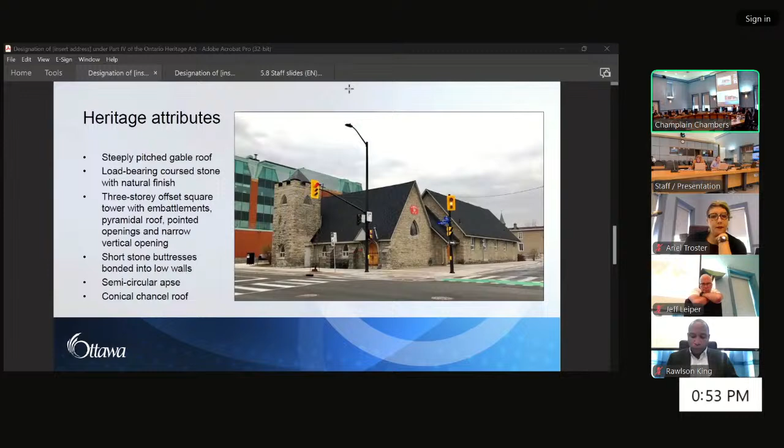The contextual value of St. Margaret's Church is embodied in its corner location right at Montreal Road at Cody Avenue.

Through research and evaluation, heritage staff have determined that St. Margaret's Anglican Church is a strong candidate for designation under Part 4 of the Ontario Heritage Act. The property was found to meet 7 of the 9 criteria as set out in Ontario Regulation 9/06, and staff recommend issuing a notice of intention to designate. I would be happy to answer any questions.

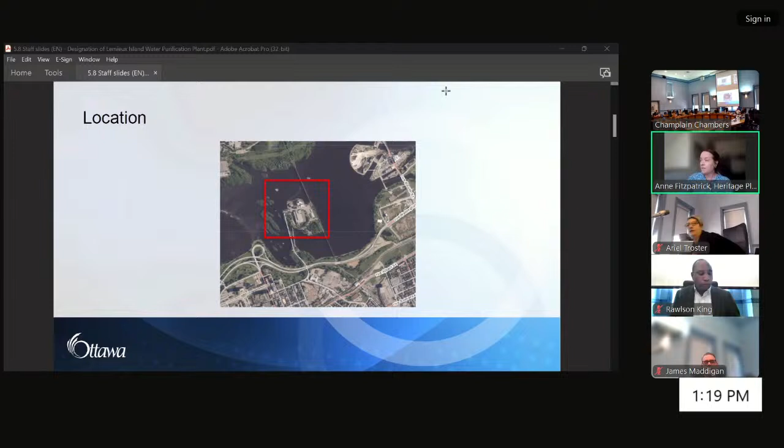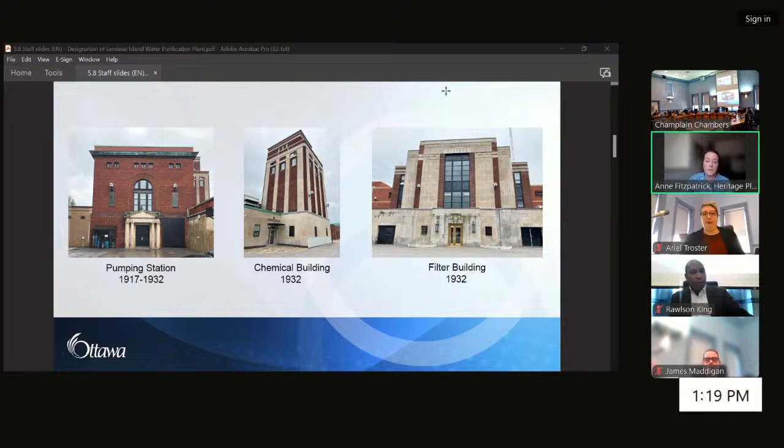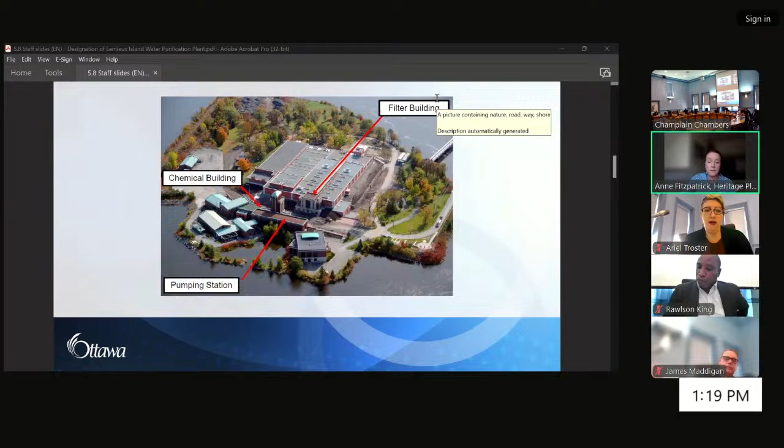Through research and evaluation, staff have determined Lemieux Island Water Purification Plant has cultural heritage value, as it was the first water treatment plant in Ottawa. Following typhoid outbreaks in 1911 and 1912, caused by pollution in the Ottawa River, establishing a clean water supply became a priority. The plant gave residents access to clean drinking water, reflecting the progress of public health and sanitation in Ottawa at the time. It's also an excellent example of an industrial complex influenced by popular architectural styles of the early 20th century, in this case Romanesque Revival and Art Deco. It's an integral component of a group of historic industrial infrastructure that defines the character of this portion of the Ottawa River, including the Hintonburg Pumping Station, the Fleet Street Pumping Station, and its aqueduct. Next slide, please.

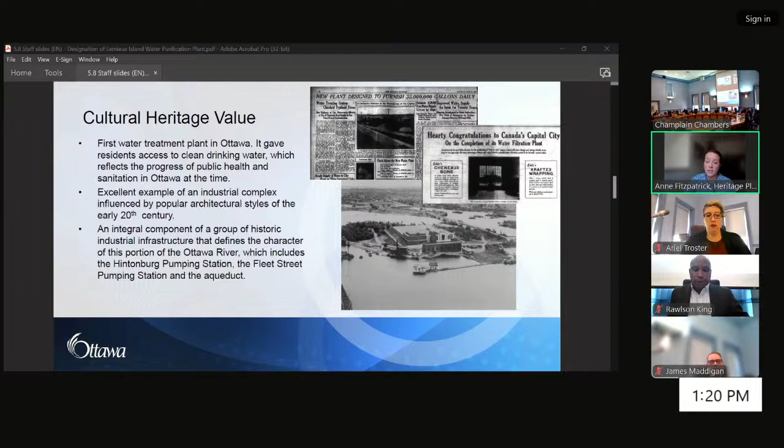The plant was designed and constructed by consulting engineering firm Gore, Nasmith & Storrie. This firm designed several other Canadian water treatment plants, including the Glenmore Filtration Plant in Calgary, and the R.C. Harris Water Treatment Plant in Toronto.

I'll just quickly go over some of the attributes we've identified for the buildings. For the filter buildings, the attributes include the prominent round arch windows, the main entrance with its portico and columns, and its decorative marble panels.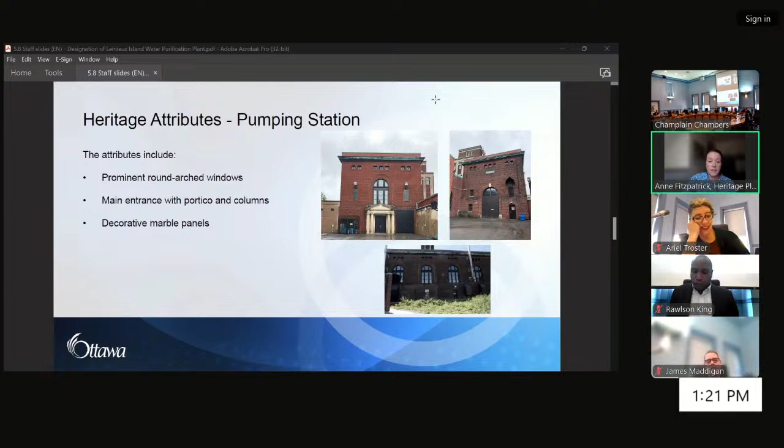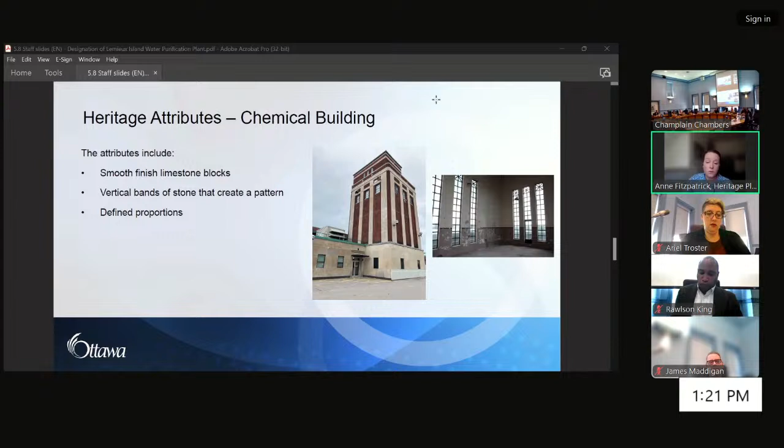The attributes for the chemical building included smooth finished limestone blocks, the vertical bands of stone that help create that pattern of the building, and the defined proportions of the 1-story building with the 4-story tower.

The heritage attributes for the filter building, which is the most ornate building on the site, includes prominent front entrance with bronze doors, the decorative motifs and geometrical patterns, and this overall emphasis on flat vertical linearism.

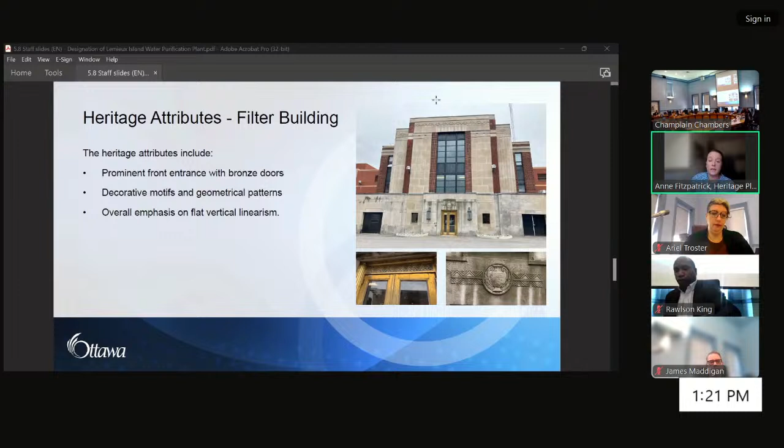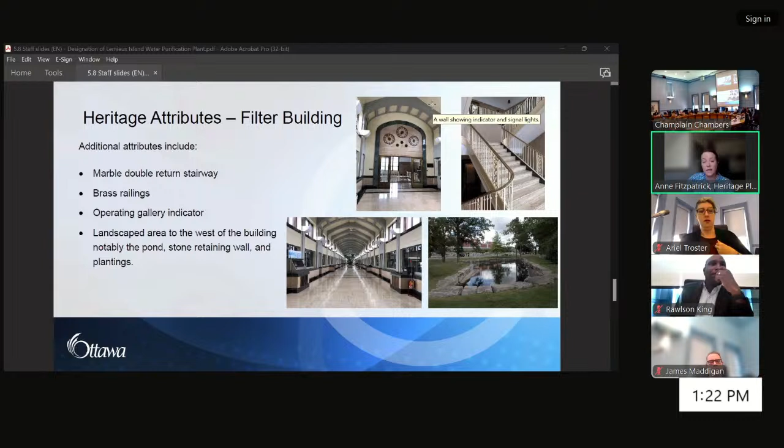In addition, the filter building also includes interior attributes such as the marble double return stairway with brass railings, the operating gallery indicator, and the landscape area to the west of the building, notably the pond, stone retaining wall, and plantings.

So in conclusion, the staff recommend the Lemieux Island water purification plant meets 8 of the 9 criteria under Regulation 9/06 of the Ontario Heritage Act. Staff recommend that council issue a notice of intention to designate the property under Part 4 of the Act. Thank you.